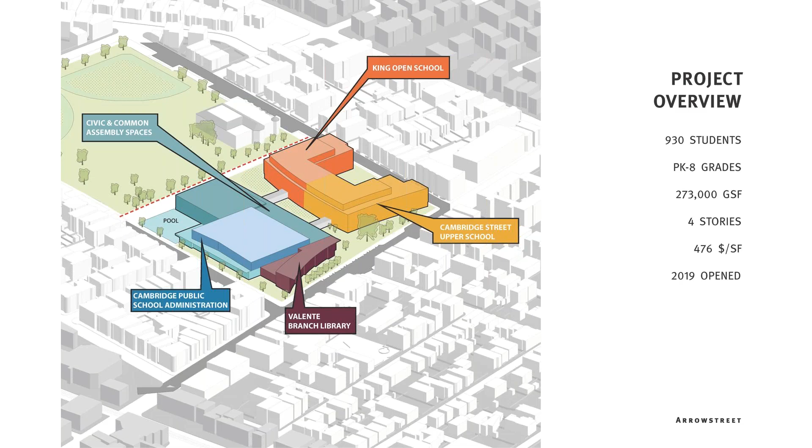The building was basically divided into two sections. There is the main classroom and academic spaces on the west side of the site, and on the east side, as you saw in the previous diagram, are the more community and public accessible spaces. Along the front of the building, we were able to develop a civic plaza and preserve a 100-plus-year-old sycamore tree that is part of the history of the site. We were able to increase the amount of open space on the site by about half an acre, increasing all the green space on the site, which was previously all asphalt parking spaces around the previous existing building that was there.

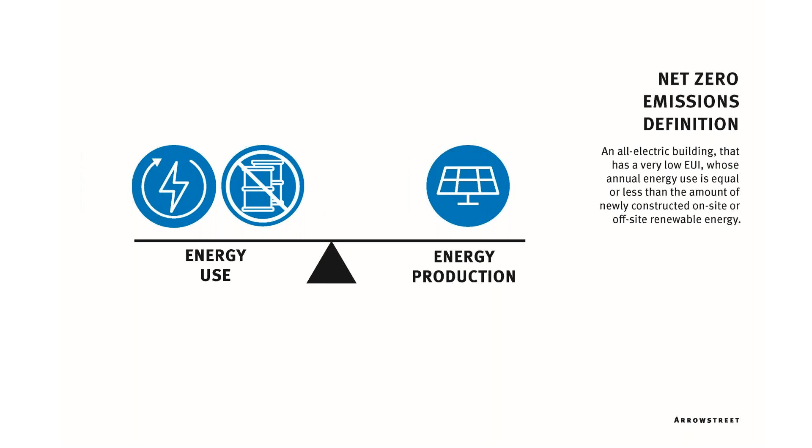So net zero emissions definition, pretty straightforward: an ultra low EUI building who's using on-site or off-site newly constructed renewables to offset the energy use, and that has no fossil fuel combustion on site. So it's an all-electric building.

I'm going to talk through the rest of the case study by going through our design process. Starting at the beginning of the project, at the end of 2014, we needed to set an EUI goal. Net zero was already a goal of the project, but we were trying to figure out what the target for EUI should be.

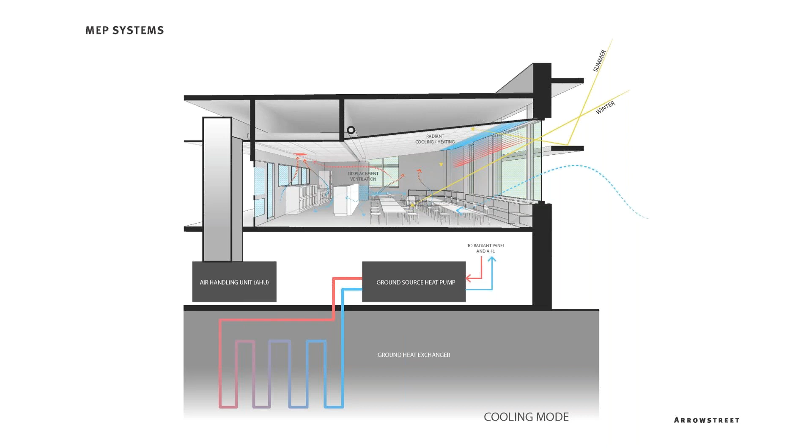This particular project, similar to the projects in Kentucky, employs a ground source heat pump system with closed geothermal wells, supplying chilled and hot water to the radiant panel system. There's also a displacement ventilation system. We find it's really important to decouple the heating and cooling from the air system, so you're not relying on air to do all your heating, cooling, and ventilation. That's key when trying to hit ultra low EUIs.

Here's a full list of the different mechanical, electrical, and plumbing systems incorporated in the project. There's a geothermal well field with almost 200 wells, supplying radiant heating and cooling with displacement ventilation. There's heat recovery, demand control CO2 ventilation, LED lighting—which is pretty standard—and daylight control. We also use on-demand hot water, basically at every sink or every two sinks in a restroom, as on-demand points of use hot water systems.

The next step is really thinking about measurement and verification. You need to know what's happening in your building so you can see what's going on, especially if you start seeing energy usage you didn't expect. On this and other projects, we see owners who are really committed to doing initial commissioning and having commissioning agents available for a couple of years after the building opens.

Training happens during construction, during initial operation or opening, and then continuously. There are different platforms, like videos and on-demand resources, that training staff can use—staff who aren't always there at the beginning of a project opening. Staff changes over time, so you need to make sure everyone coming in understands the training, along with a building management system, which is fairly standard for large commercial buildings.

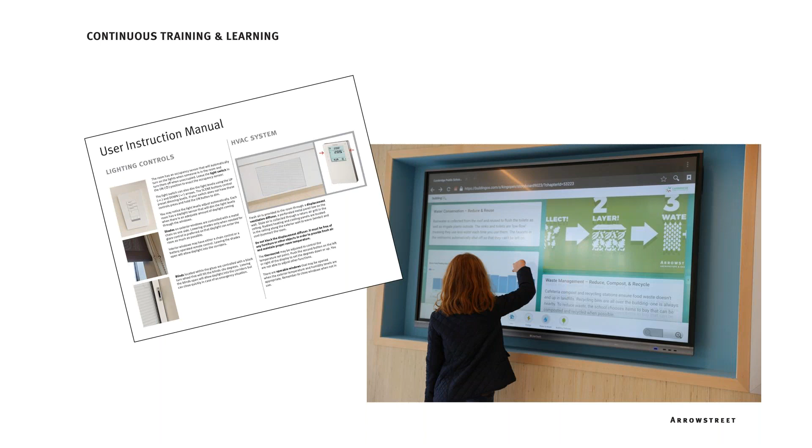There are also environmental graphics on the walls throughout the building that talk about different sustainability features, not just net zero. There are also dashboards, both in public spaces and in the schools, for occupants to access content about their building's features. They can see energy usage, energy generation from the photovoltaics, and water usage from the rainwater reclamation system—accessible from any platform, not just these dashboards. It's important to provide an opportunity for occupants to continue their education as new students come in or staff changes, and to use it as an educational opportunity if they want.

This particular client was very interested in understanding how they could use data about their building for critical thinking and problem solving curriculum, both in the elementary school and the middle school.

Occupant engagement is really key to the whole process—without it, there's really going to be a breakdown and failure. Before we started this project, we visited a few net zero buildings that weren't schools but were in our area. One thing we noticed was that many weren't operating at net zero, and a recurring theme from maintenance staff and occupants was that occupants hadn't been as engaged in the design process as they could have been.

Buildings were being used for different things or in different ways, or the schedule of hours of operations, were very different than were anticipated. So at the beginning of this project, we created a process to make sure we were involving the occupants in a way that would help us be realistic about what was going to happen in the building, to make sure we weren't underestimating energy use, but also to take advantage of design strategies by engaging the occupants that would allow us to achieve energy reduction.

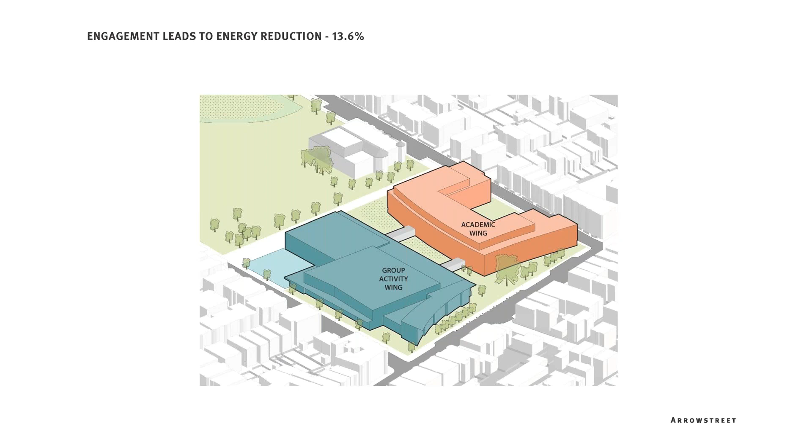Again, the academic wing on one side with most of the classrooms, and then larger group activities like auditoriums, gyms, cafeteria, and the public library on another side. That was through the occupant engagement process and being very rigorous in understanding how and when they use their spaces, so we could couple adjacencies in the program of such a big building, to share mechanical units and air handling units between programs similar in use and hours of operation, so you can shut down and set back different pieces throughout the day, week, or year, because this building is used 7 days a week, probably 355 days a year. So it has high hours of use.

In terms of planning, we were able to tie the way staff and teachers wanted to work collaboratively with their cohorts and within their classrooms to create ways to save energy by doing all the things they needed out of their building. We saw fairly significant savings by grouping equipment and energy into teaming rooms, as opposed to having the same equipment in every single classroom, which is what happened in their existing spaces.

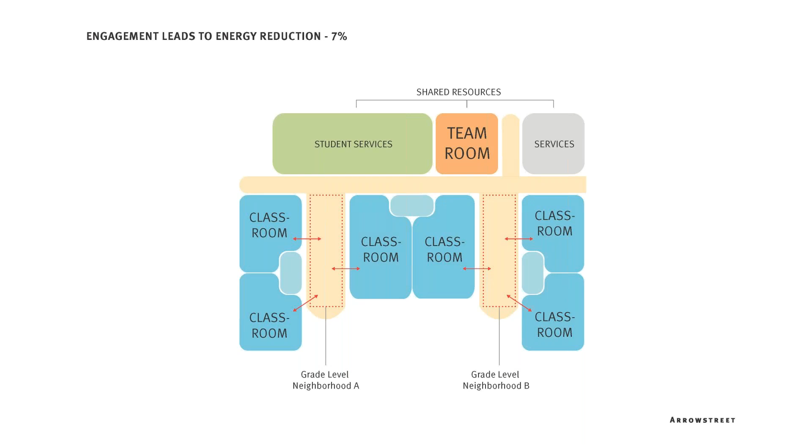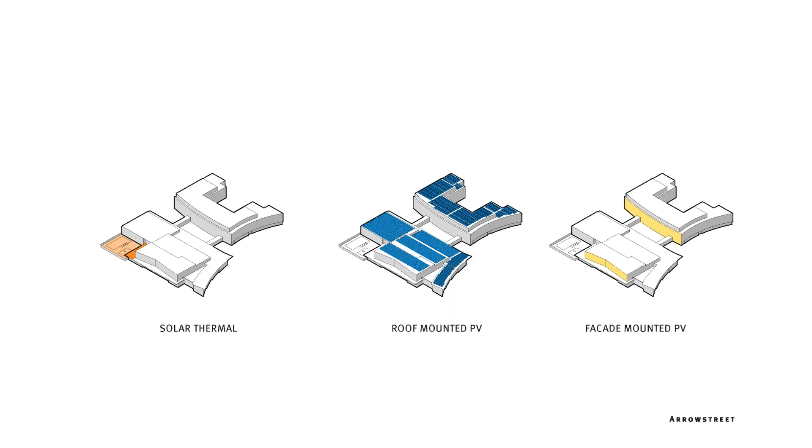For renewable energy, as you saw in some of the photos at the beginning, there are photovoltaics on basically every roof surface. We also have facade mounted panels in a couple different ways - there are sunshades where the actual panels are used as sunshades over windows, and we have vertical facade mounted PV on the east and south. We also have solar thermal, used to heat the pool during the shoulder seasons of the outdoor pool, and when it's not being used to heat the pool, it also supplements the domestic hot water for the kitchen.

And of course, Arrowstreet is one member of a very large team, and I wanted to recognize everyone because, as was mentioned earlier, it's a really big coordination between the owner, the design team, and the contractor - as it is in any project, but especially important in a zero project, so everyone is familiar with the goal. I'd say the geothermal system, especially on this very tight urban site, was one of the things we really worked a lot on coordinating with the contractor.

And with that, I would say thank you for your time, and it's very exciting to be able to share this project. Unfortunately, the building will not have been open for quite a while of its first year due to current circumstances, so we're going to be waiting a little bit longer to see if the building is operating to its net zero.

Thanks, Kate. So I'm going to take a couple quick minutes here to talk about the kind of resources you can use to get to zero. This may be familiar for some of you, but it's the most common question we get: what resources can I use to get to zero? So I'll walk you through them really quickly. There's quite a few slides, so I'm going to glance over it, and you guys can refer back as needed.

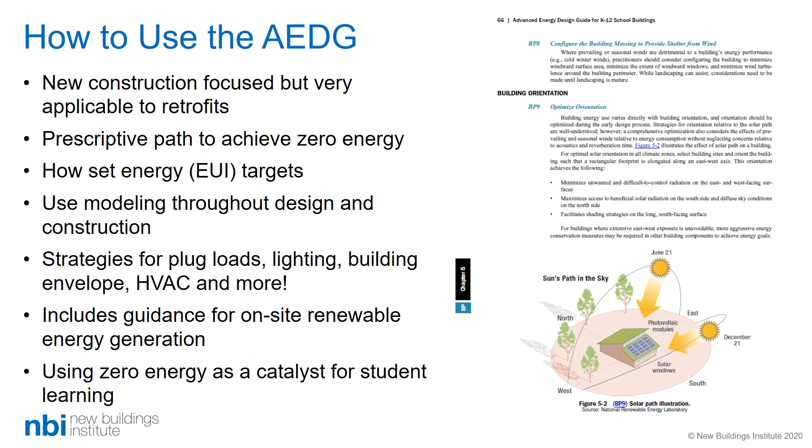It shows you how to set EUI targets, how to model, guidance for renewables, and of course, as Kate and Mike were talking about, using zero energy as a catalyst for student learning. There's also an accompanying zero energy process guide that's more of a process approach, so it's a little more appropriate for maybe a school board or a more institutional audience.

Connie, would you mind asking a few questions? No, not at all. We have a couple for Mike. One: do you have any published data or reports that back up your statements, just to be able to share with their local school board?

Yes, we do. I don't have the information with me, but if you could share it with the people at NBI, I'd be glad to forward it on. We have a post-webinar follow-up email going out tomorrow, so if you can get that resource link to me, I'm happy to add it so everyone can see it.